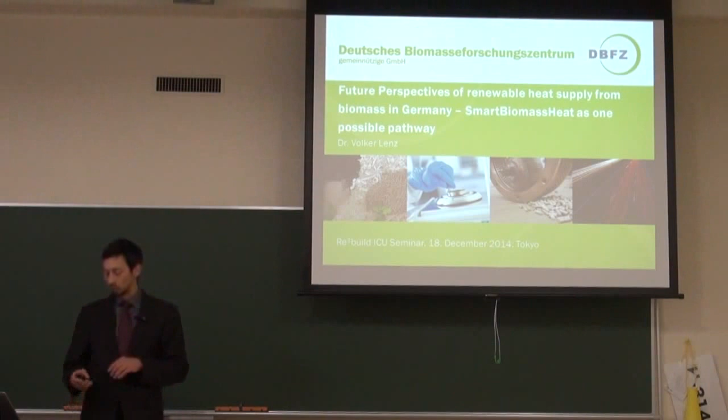Last but not least, I will give you some examples of research and development on this topic to come forward with this. So let me introduce a bit the German Biomass Research Center.

It's owned by the Federal Ministry for Agriculture, which is the only shareholder of our company. We have a supervisory board of different ministries in Germany: Environmental Ministry, Research Ministry, Building and Traffic Ministry, as well as the Saxonian Environmental Ministry. All these ministers decide, through their representatives, about the work we do with the funding we receive. Additionally, we have a research advisory council of experts from all over the world who give us ideas once a year on what we should focus on with our research.

We are organized in 4 scientific departments, of whom 2 have a very strong link to the Helmholtz Center for Environmental Research. One is Bioenergy Systems Research, where we look at potentials and the integration of bioenergy into the state-of-the-art energy system and also into a future energy system with more renewables.

In the Biochemical Conversion department, they deal with all kinds of anaerobic digestion. They have a lot of reactors to improve these processes, to look into the microbacteria work and so on. The Biorefinery department deals with all the liquid fuels and questions of transport, developing by gasification and synthesis the production of different kinds of fuels.

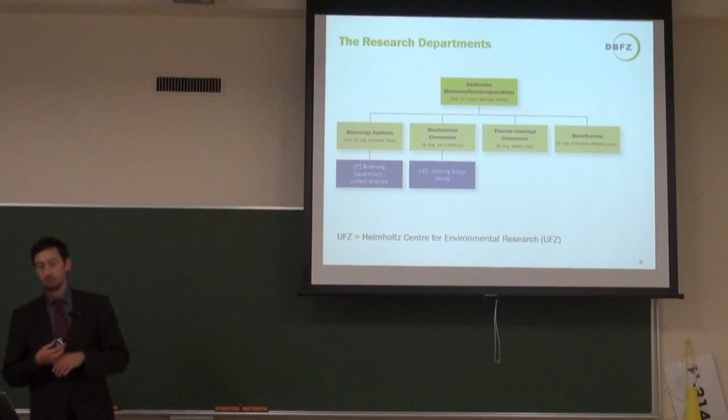And Thermo-Chemical Conversion, that is my department, where we work with about 40 people on all the questions of innovative solid fuels. That starts with wood fuels, upgrading these by pelletization, by thermochemical conversion, but also all kinds of agricultural fuels, residues, byproducts, wastes, and so on.

Then we have a working group for small plant technologies. There we look into boilers, furnaces, and so on - how to develop them, how to improve them, how to reduce the emissions and improve efficiency.

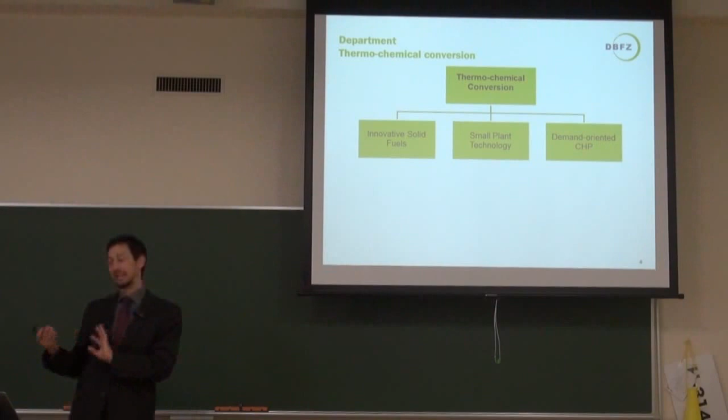And last but not least, we have a working group for the future where we develop demand-oriented small-scale CHP technologies - that will be one part of the smart biomass heat idea. They also concentrate on all the questions of controller systems and improving the work together of different energy sources and energy uses. So these are just some points of our main work here listed, as I've told you already.

So what is the motivation for bioenergy in Germany? This is clearly, I think, also true for Japanese conditions. We have in Europe some regulations about climate change protection. For the European Union, there should be a reduction of 20% until 2020, starting off the state of 1990. And Germany has

committed that we will have a reduction of 40%. And this year, our government noticed that we will probably not reach this target, so they have made up a plan to go for further measures and further actions to reach this target. Worldwide, you probably know this target of not more than 2 degrees centigrade of more average temperature on the world.

Some people discuss whether it should be 1.5 degrees or if 2 degrees is enough, but independent of that, it is clear that we have to have a reduction of at least 80% of all worldwide global warming potential emissions. That means for industrial countries like Germany and probably also Japan, we have to have a reduction of about 95%.

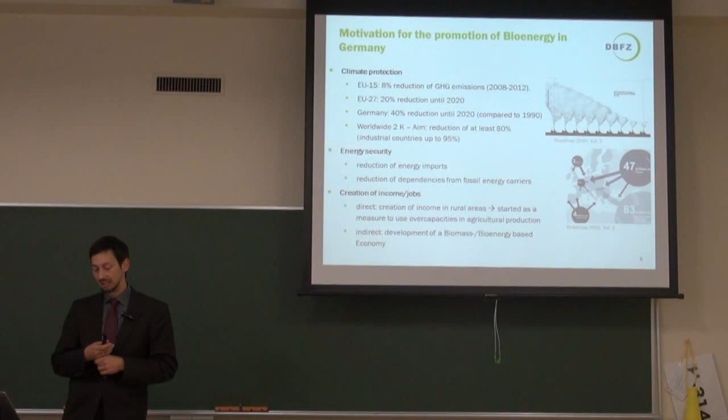From my two visits, I learned a lot about the fact that Japan has quite a lot of wood until now, but because of the history of the last decades, there was too little use, and now there has to be a lot of development to bring the value of all your forests into use and into new value chains. So that links very well to this target.

So what is special about bioenergy? There are some chances, some challenges. First, the chances: it's the most frequently used renewable energy in the world. About up to 80 to 90% of all renewables worldwide is bioenergy. And that's easy to remember if you think about its use for cooking and heating in developing countries, but also in countries like Germany, as I'll show you later.

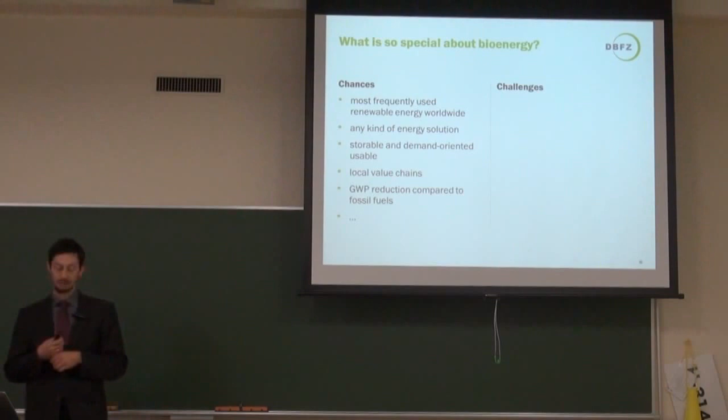Any kind of energy solution is possible. We can create heat, power, and also transport fuels from biomass. In comparison to other renewables like wind or solar, where you typically get electricity and sometimes also heat, biomass can supply all kinds of these energy solutions. It's storable, so you can use it demand-oriented. There are local value chains, as we discussed, and there's a global warming potential reduction potential compared to fossil fuels, and a lot more.

But on the other side, there are also some challenges. We have a limited potential, meaning biomass has to grow on area, and area is, especially for Japanese conditions, a very rare resource. So you can only create a certain amount of biomass. And as there are different kinds of uses - for food, for feeding, also for material use - we will possibly come to conflicts.

Sometimes from these conflicts there could be a non-sustainable use of the resources. If you think about rainforests, there's always the problem that if you take too much wood out of a forest, you can destroy it. That's what's meant by non-sustainable.

We have limited standardization compared, for example, to gasoline or diesel fuels, where it's very clear what's in such a fuel. In Europe we have some discussions, and some norming activities have already started. But biomass can be very, very different, especially regarding trace elements, which have a lot of effect on combustion emissions and so on. So a lot more work in standardization is necessary to avoid high prices of the technologies used.

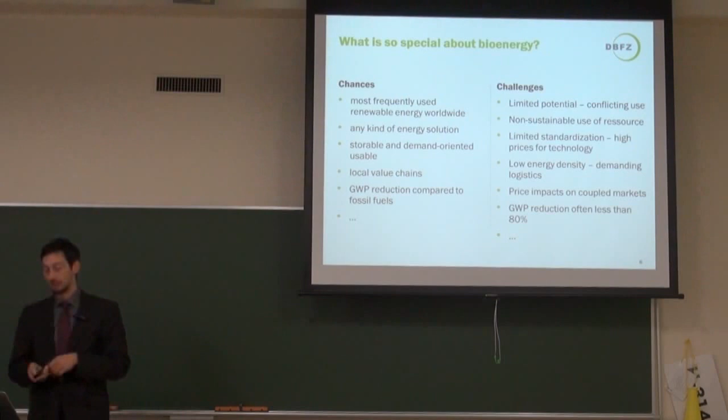In those times, prices for wood were very low, and the sawmills had the problem that they couldn't get rid of their residues. When they produced construction wood, they had about 30 to 50% residues from the stem wood, and they couldn't use it. They were glad if they could give that away for free.

That seems bad at first, but on the other side, prices got up so that it was valuable to take more wood and more residues out of the forest. So only with this increase of price could you manage to get the potentials used.

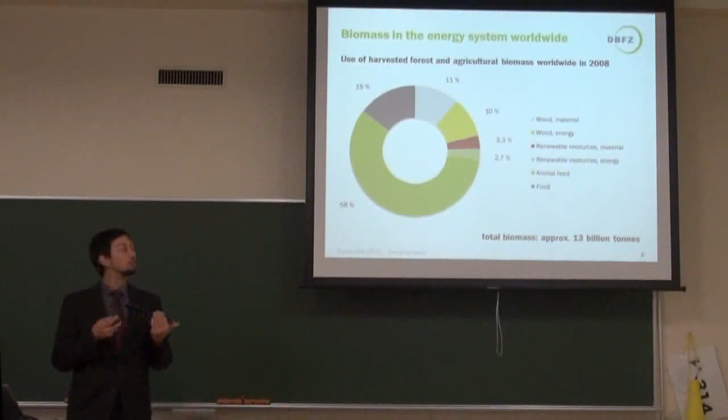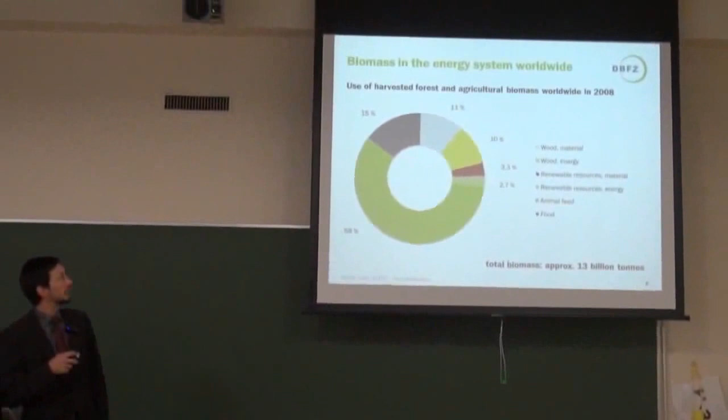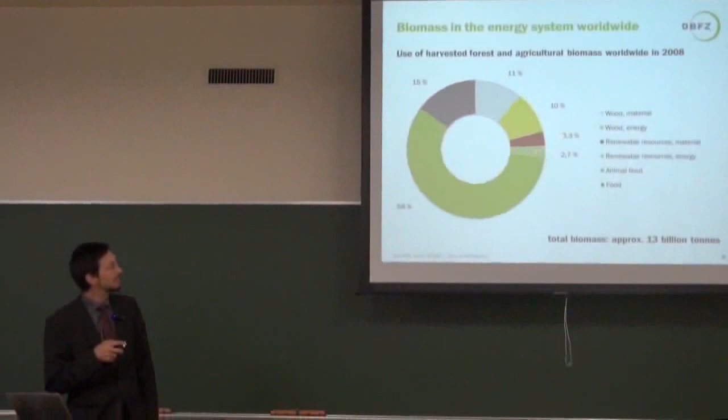That is linked very well between a material use of wood and the energy use of wood. We've seen 50-50%. And we have a use of energy by renewable resources. That is really planted and farmed energy. And that is in contrast to this big amount of about 73%, 3/4 of all the planted biomass.

And you see also that a very big amount of the biomass is just used for animal feed. And that means especially the usage and the eating of meat. So if we discuss this small part, we shouldn't forget about the amount of biomass we consume by our nutrition.

For Germany, a short picture. This is all the final energy consumption in Germany 2013. About 12.3% come from renewables. And the biggest part, even if we talk a lot about wind power and photovoltaics, which have developed very well in the last years, still more than 60% comes from bioenergy, and that in an industrialized country.

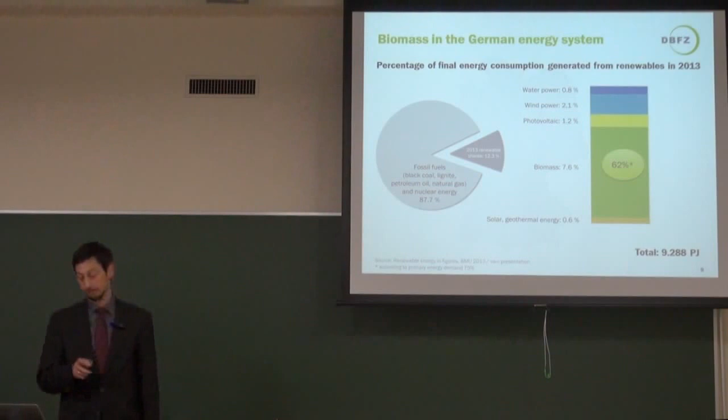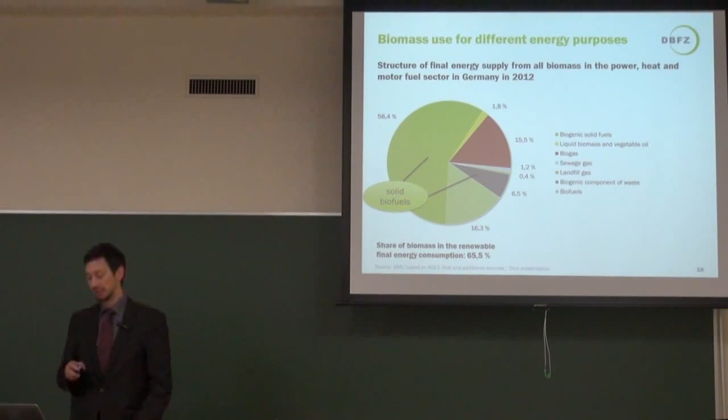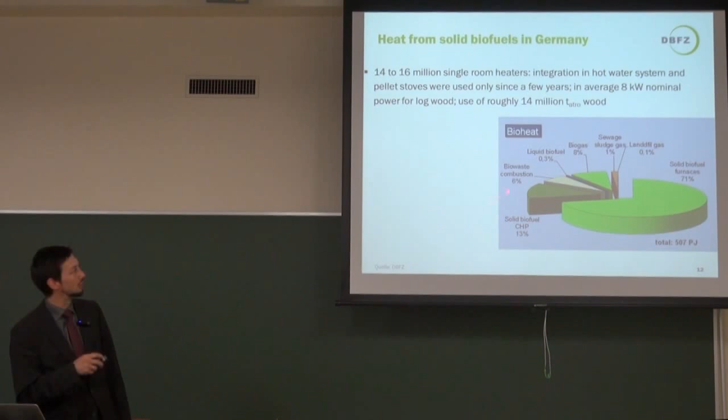So what are the uses for the solid biofuels? What you can see here is that about 70% of all the fuels from the primary sector is used in furnaces. And that means that we have about 14 to 16 million single room heaters. With a population of about 80 million people, we have 14 to 16 million single room heaters in private housing.

And additionally, there are about 0.7 to 0.9 million woodlog and wood pellet boilers in your basement for central house heating. That is very much more common than in Japan, I learned. We in Germany have longer cold winters, and so people like to have a central heating system with radiation and air changes. And the heat output is about 15 to 300 kilowatt each.

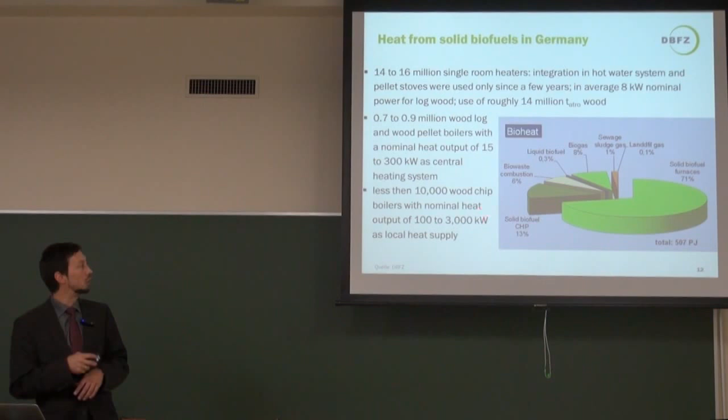Then we have less than about 10,000 wood chip boilers with a nominal heat output of 100 to 3,000 kilowatt. This is especially for the heat supply of district heating systems. So to see what is the state of the art for these technologies, we have the single room heaters here.

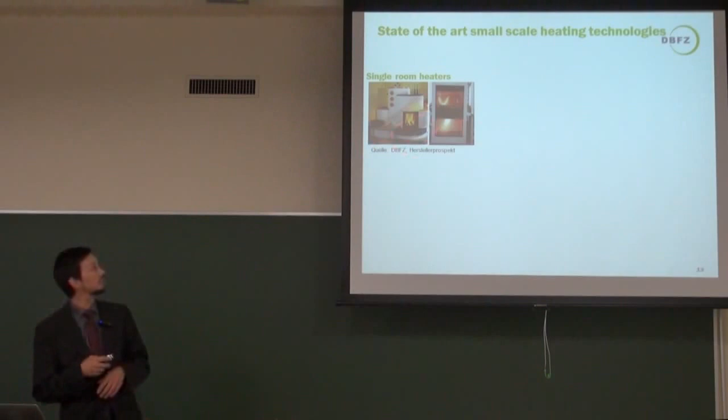For these stoves, the market developed very well, also for pellet boilers. What you can see here is a column of the pellet production capacity. There was a jump in the years 2006 to 2007 when this technology came to Germany from Austria and Switzerland. And you see that then this development can rise up very, very quickly.

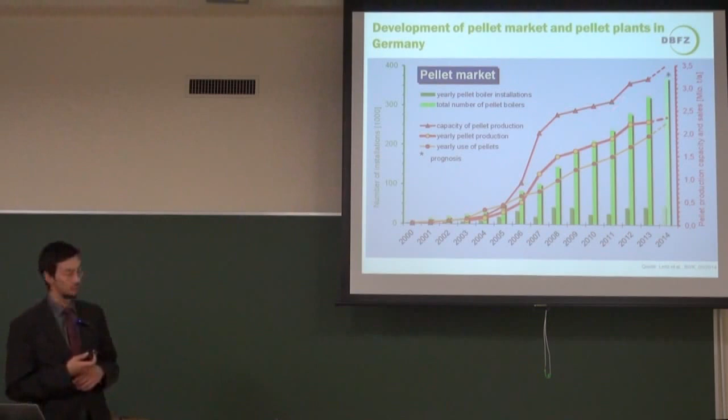We have installations of new units of about 20,000 units per year and reached already in 2013 about 300,000 installations in Germany. So what does the policy for these developments? On the electrical side, just a small insight, we have a Renewable Energy Act with a feed-in tariff. You have also in Japan integrated in the last years.

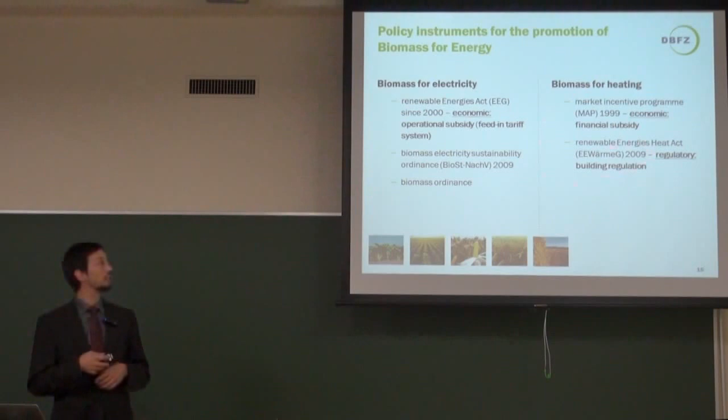We have a sustainability ordinance for biomass production to electricity and also a biomass ordinance where it's defined which kind of biomass can get a feed-in tariff. On the other side, for biomass heating, we have a market incentive program, especially also for private persons to get a financial subsidy if they install a biomass heating system. And we have a Renewable Energies Heat Act for new buildings and also for bigger renewings of buildings. There you have to install a certain amount of renewable energies.

What are constraints in Germany? In the biomass for electricity sector, we have a change of the Renewable Energy Act in 2014 this year, according to a long discussion about rising electricity prices according to the feed-in tariffs, that have stopped or lowered a lot of these tariffs, so that it is very hard to get new electrical power plants from solid fuels in the future because the feed-in tariffs got too low.

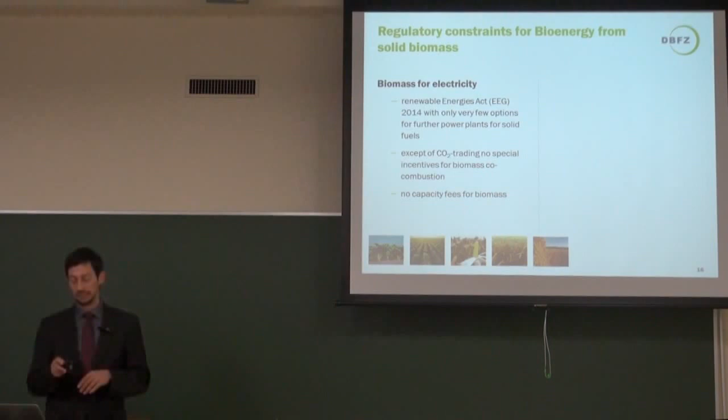We have very low CO2 trading fees in Europe at the moment. They are about 7 euros per ton. So there's not much incentive for big power plants for co-combustion at the moment. And we do not have any capacity fees for biomass, what could also be a kind of subsidy.

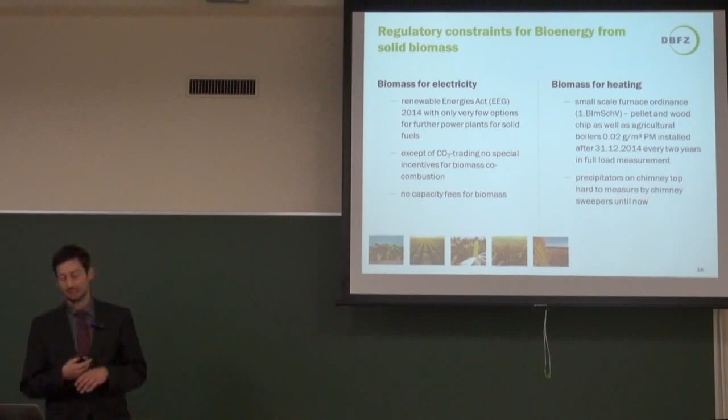In the heating sector, we have especially a problem with a new or renewed small-scale furnace ordinance, where there is legislation on the emission level that is allowed for private boilers, and it is lowered by about a factor of 5, especially for particle emissions, and that is a real hard nut to crack for the developers to get along with that without precipitators. And the precipitation for these small units is just under development, and there are also some additional problems on that field.

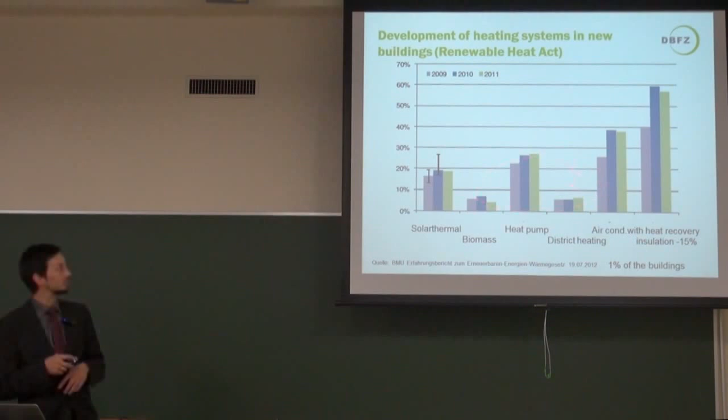That, in mind, leads to a statistic about new installed heating systems in Germany. And what you can see here is that biomass is more or less the smallest amount and percentage of all the new installed heating systems. Most people try to do a better insulation so that they can get rid of this need for renewable heating. And also a lot of people use air conditioning with a heat recovery. And for the renewable energy technologies, especially the heat pumps are very favored.

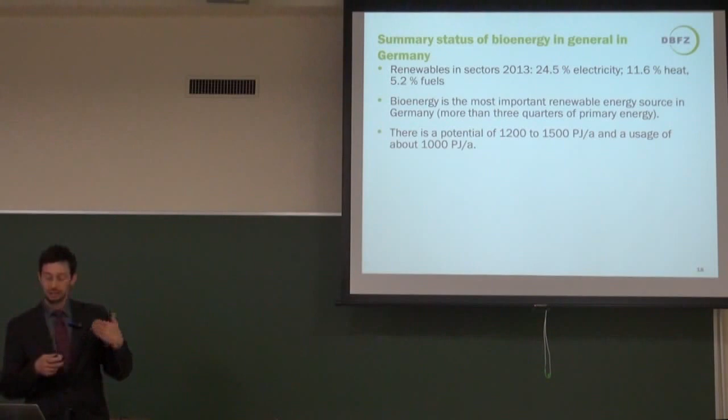So to sum the status of bioenergy up, we have renewables in the sector 2013 about 24.5% for electricity, 11.6% for heat, and 5.2% for fuels. We still have bioenergy as the most important renewable energy source, and there is still a potential from 1,200 to 1,500 petajoule per year, from which about 1,000 petajoule is used. So we can increase the use, but it is limited.

The better prices for wood and agricultural products are good for the producers. They give them a higher income, and it's more valuable to create these energy resources, but at the same time, the biomass feed-in tariffs are among the highest ones, even after the last reduction, because in solar energy they went very, very down according to the better price development.

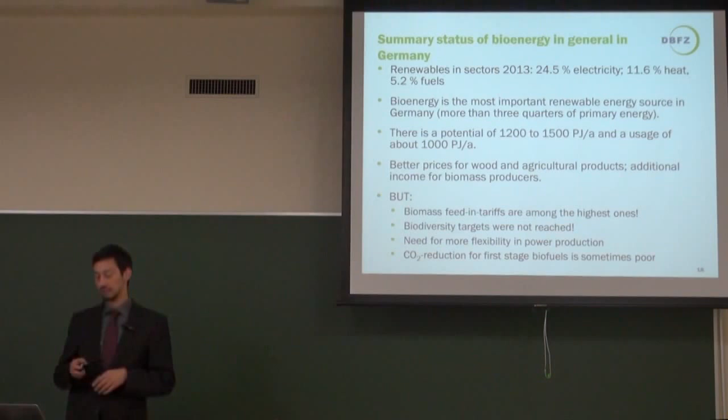We have not reached the biodiversity targets for many years. That's not only connected to the bioenergy development, it's a problem of our agricultural system, but that depends a bit. We have a need for more flexibility in power production. I will show you later on. And in the biofuels, I have already told there's not enough CO2 reduction.

So what restrictions are there for further bioenergy development in Germany? Biomass gets more and more scarce, I told you already. And in the future, we think that especially wind and solar will have to be the backbone of the quantitative production of renewable energy, because there are very, very big potentials. This is true for electricity, but also if you think additionally of geothermal heating for the heat sector.

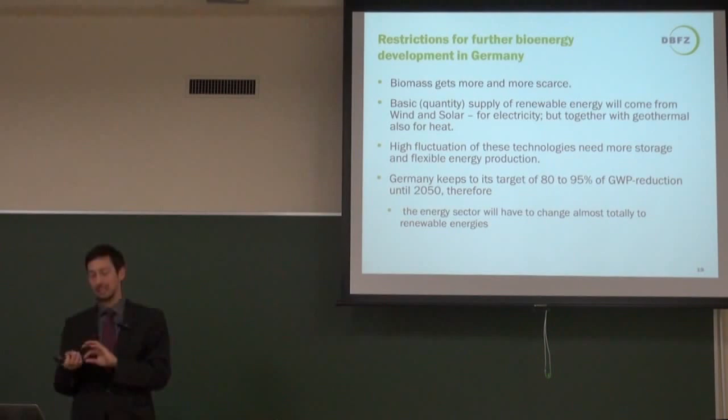According to the high fluctuation of these technologies, for electricity as for heat, we need more storage and more flexible energy production. And if we keep up this 80 to 95% target for CO2 reduction in Germany, we have to change our energy sector totally to renewable energies. So the compensation of the fluctuating renewables cannot come from fossil fuels. It also has to come from renewables. And the demand for the heating sector has to be reduced by at least 80%.

Otherwise, we will not have enough potentials to come to this totally renewable heating production, but that is possible by better insulation. So, is there a future for biomass combustion of solid fuels in the future? We think yes. But there is not the possibility for a massive quantitative increase in Germany anymore without imports of biomass. And that is, for a sustainability aspect, not politically wished in Germany.

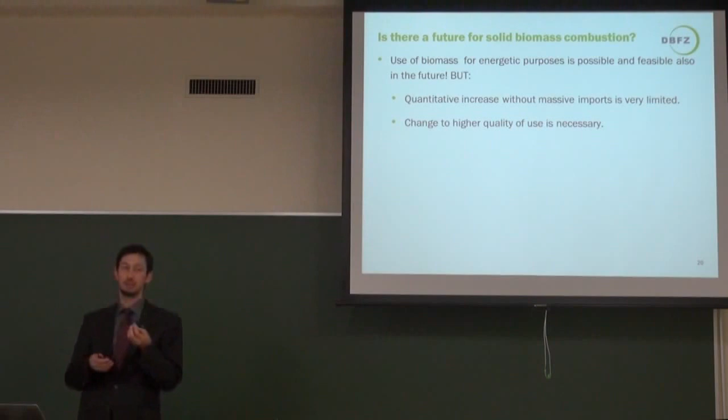And because of that, we have to have a change to more quality and less quantity in the use. And that is the point why we will come to other pathways of biomass use for heating. What we have to keep in mind for this research and development: we need sustainable biomass. So that means residues, waste, byproducts, because then all the need for the nutrition and so on of the planting is already for another purpose there. So the global warming potential reduction potential is higher.

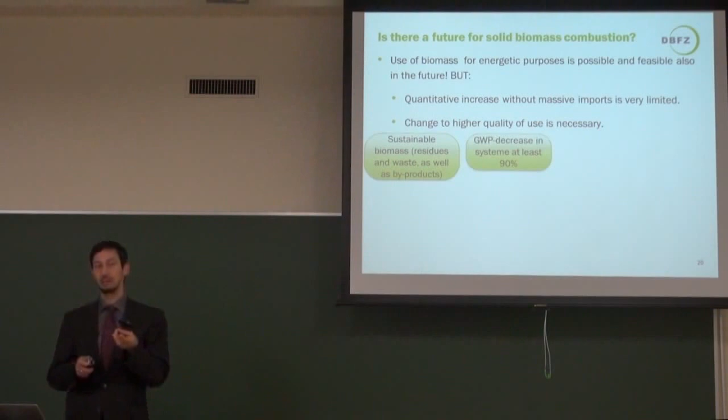The system integration must be that kind that we at least reach 90% of reduction, also with the biomass technologies, and therefore a maximum of efficiency is needed. And always keep in mind, especially for combustion processes, we have the problem with the particle emissions. We should reach a minimum of environmental impacts from the exhaust gases as well as the waste. And clearly, we have to compare with other renewable energies, and only if there is in certain technology pathways an economic advantage, then we will have a chance in comparison to solar, wind, geothermal, or so on.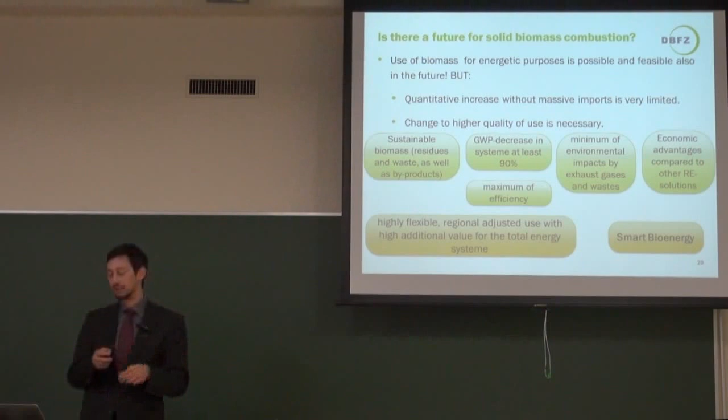That all means that for the future, we have to develop systems that have a high flexibility, that are regionally adjusted, use the fuels and residues that are available in a region with a high additional value for the total energy system. And that means for us that we will change the quantitative use of biomass towards smart bioenergy. What is smart bioenergy from our perspective?

It is a reallocation of the already big amount of biomass used worldwide, as well as in Germany, away from the traditional aspect of as many full load hours as possible, away from the baseload-oriented bioenergy to a more technically improved, more efficient, and more need-based use, and then a better integration in the total energy system of material use and energy use. So, what we cannot say at the moment is where we will go exactly, because that's in the far future. But we can give some criteria for new developments.

The first is that we think about smaller biomass throughput. We did have the discussion in Germany about very big industrial installations with hundreds of thousands of tons of biomass to be reformed to biofuels. That means that there could be 5 plants in the whole of Germany and then bring the biomass for hundreds of kilometers to one plant. And if you think about that, a lot of people don't like that. That is easy to understand. And all these negative mass effects you can avoid with a higher regionality and smaller units.

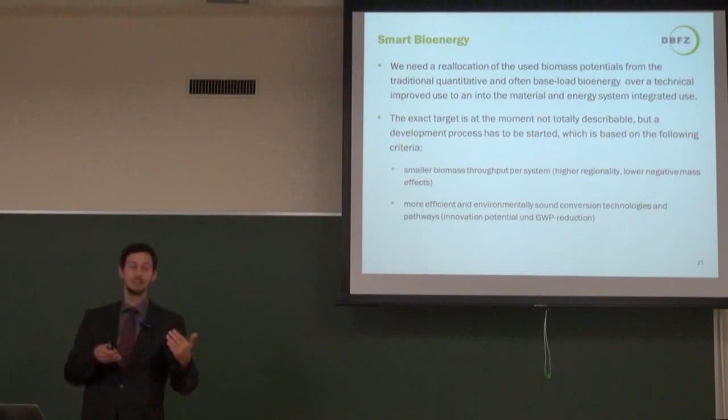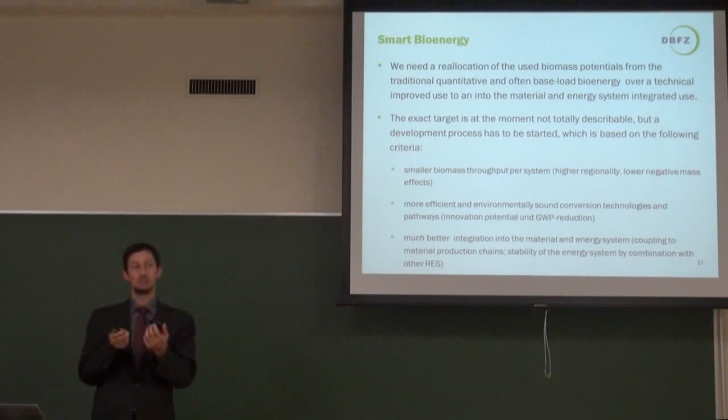We have to be more efficient, clearly, and especially environmentally sound, so that the neighborhood is not disturbed by this technology use of the fuels. And we need a better integration in the material and energy system. That means that we should couple a biomass value chain between the material production and energy production. If you look to forests, then try to get out as much construction wood as possible, and from the wood residues, you then can go to a good integrated energy production.

So what does that mean for heat production? First, we should use firstly solar thermal, geothermal, waste heat, and also if there is additional electricity in the grid, then you can use that for heating, and then with small-scale biomass units, fill the gaps.

Secondly, for more environmentally sound technologies, we will probably go to pre-gasification in the combustion process or total gasification, then go to small combined heat and power production units with an intelligent buffer control system and also some catalytic gas cleaning system to go to very low emissions also during load changes. And last but not least, use residues and byproducts as fuel, and adjust your installation to the heat demand so that every energy you produce on the heating side is really used. And then look if you can produce additional power.

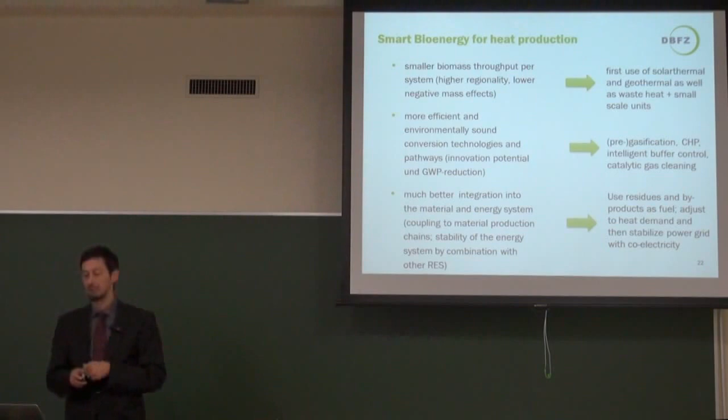And as heat can more easily be stored in a water buffer, for example, than electricity can be stored, you can produce your heat over the time and over the day at those moments when your local grid needs additional power to be stabilized. And that is also an aspect of better integrating into networks and systems. So as a result for the heat production, in Germany, we like nice heat. And we want to be self-sufficient. And for these reasons, we are willing to pay some money for wood and also for biomass systems.

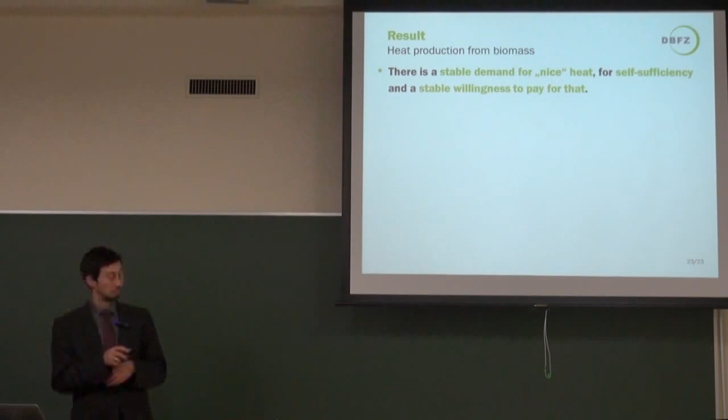We need 100% renewable heat production for the future to reach the 2 degrees centigrade target of climate protection. That means a massive reduction of heat demand and the use of all kinds of renewable energies. For our development, that means the units of boilers must become much smaller. Nowadays in Germany households have boilers with 10 to 15 kilowatt, but in the future they will have not more than 2, 3, or 4 kilowatt of power output.

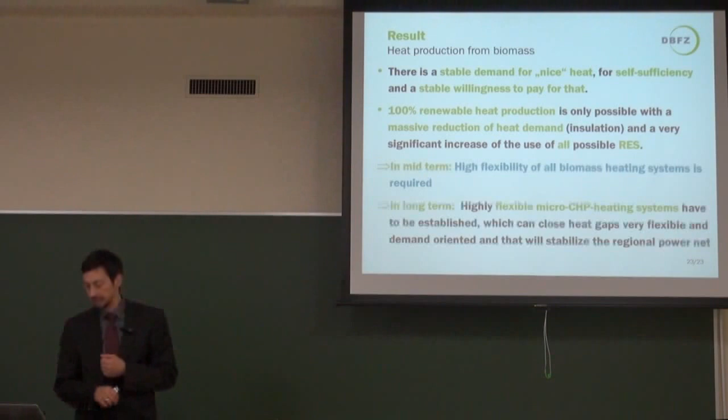So we need more flexibility in the heating systems, and in the long term, thinking of 2030, there will be these flexible micro-CHP heating systems. That is the concept of smart biomass heat, shown here. This concept needs a conditioning of biomass and regional biomasses to a high-end solid biofuel, so it can be well conformed and flexibly converted by new technologies.

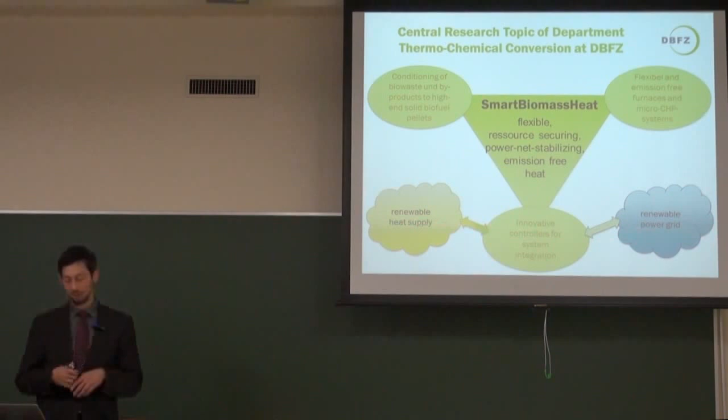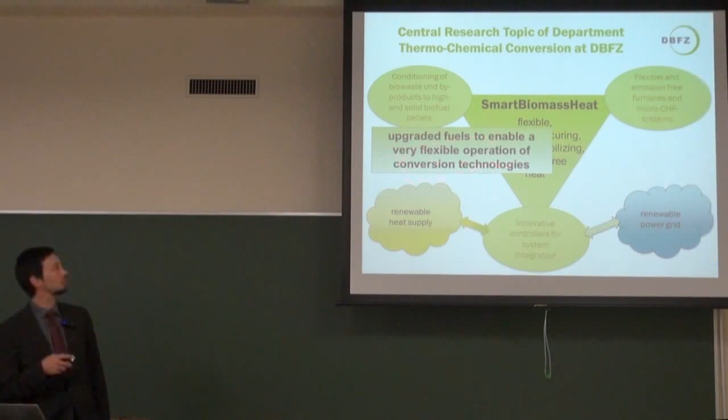These technologies are more or less emission-free, including CHP technologies. Very important are innovative controllers for system integration into a renewable heat and power grid system. What I will show you now are some first technology examples and developments about upgraded fuels to enable this flexible operation, and some emission reduction options during flexible operation we are working on.

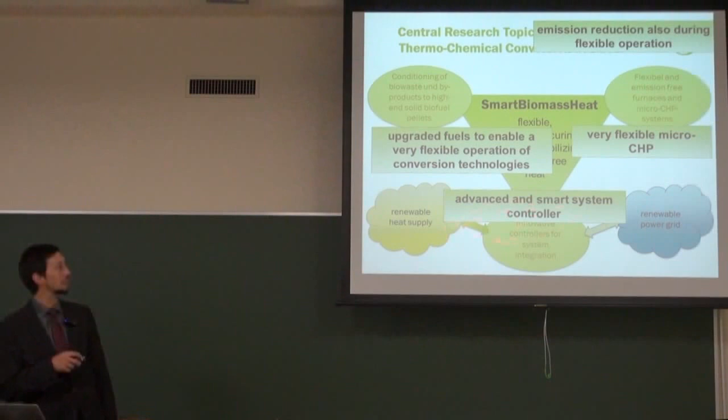Very flexible micro-CHP—micro-CHP is about less than 1 kilowatt electrical. A lot of people believe that is not possible with solid biofuels, but I will show you an example of that, along with advanced controllers and smart controller systems.

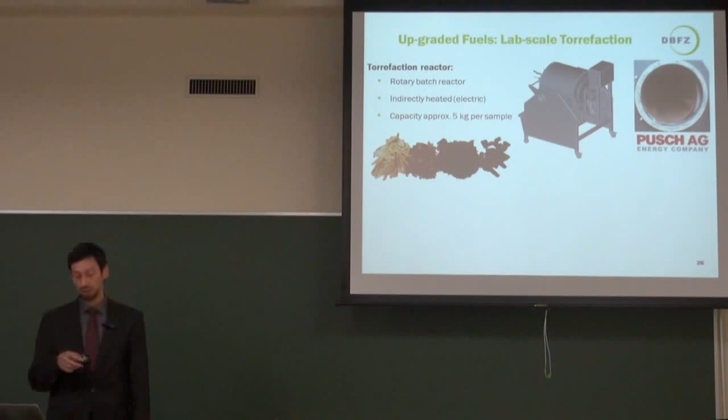To start off, upgraded fuels is firstly the question of torrefaction. Torrefaction is heating the material in either a batch reactor or a continuous flow reactor at about 200 to 300 degrees for 10 to 30 minutes. By this, the material changes and gets torrefied, becoming more and more dark, to a dark brown material. You have a loss of about 30% of your weight, but only 10% of energy loss. If you compact it afterwards with pelletization, you can increase the volumetric energy input by about 30 to 40%, meaning you come nearer to coal conditions and have a higher energy impact.

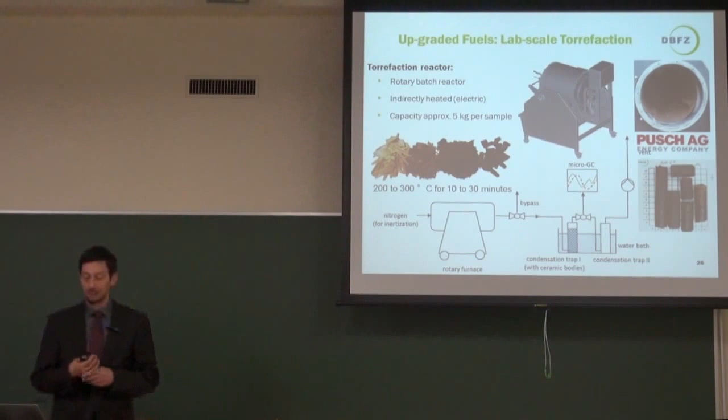This is what these fuels could look like. The FFPRI has just opened a new installation yesterday in cooperation with Sanyo Trading, and we are looking forward to cooperating on further development of these torrefaction systems.

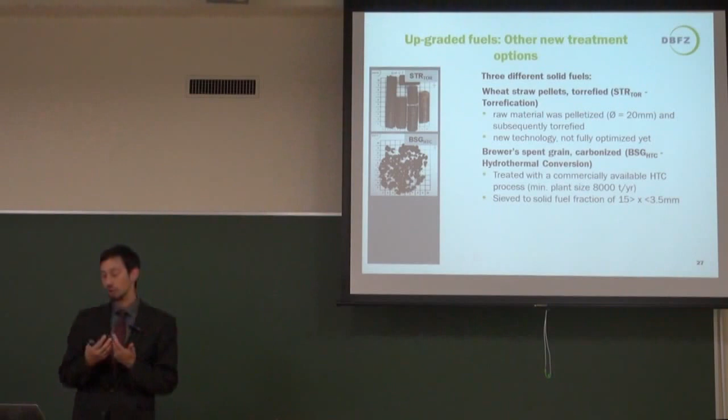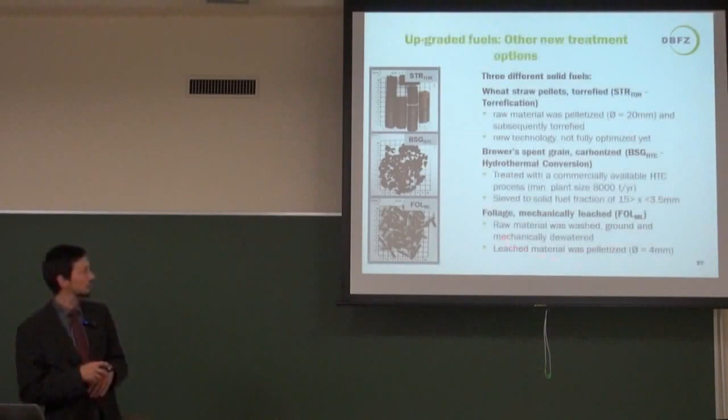To show you some other technologies for improving fuels, there's also hydrothermal conversion, especially for wet biomasses like sewage sludge. There you go to a wet phase, apply pressure and heat, and by that there's a conversion to a carbon-like material which you can sieve off the fluid and use like a coal process. What we are also working on in Germany is washing and leaching of the material, where you can get rid of some minerals in the fuel.

What you can reach with these technologies is improved storability and grindability. It's especially interesting for co-combustion in coal firing, dust firing, or gasification for biomass utilization. What you probably cannot do is improve the emission behavior, because you don't change the ash content and the ash elements—you can't remove them by torrefaction.

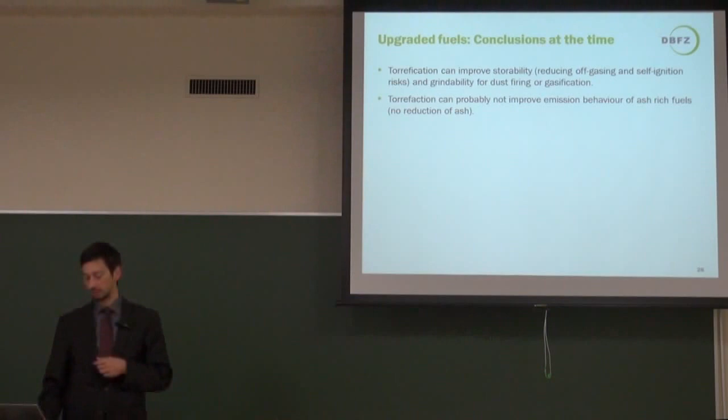You can create a high-value heating fuel from clean wood that can be used in typical boilers, but there is a higher risk of slagging and clogging of nozzles, so you have to adapt the boilers. But what we've seen, and that is important for our smart biomass heat concept, is you probably get a higher yearly or annual efficiency using this torrefied material, because it is better and more flexibly adjustable to different part loads of your boiler. At the moment, a lot of wood pellet technologies are not very good on that point.

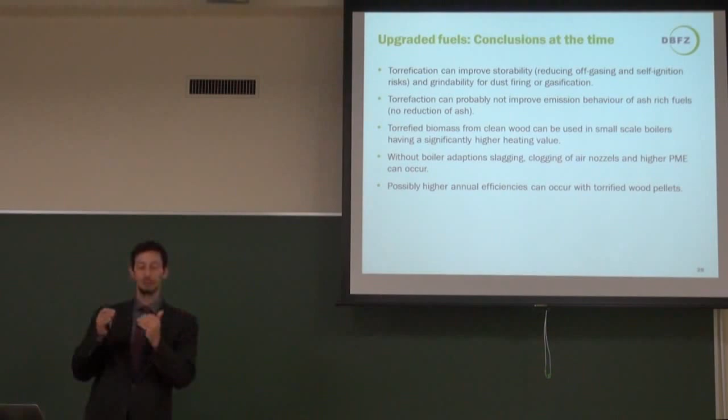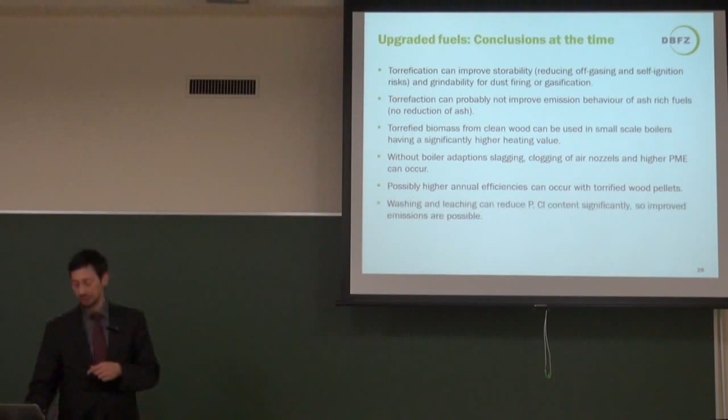In full load operation, they have an efficiency of about 85 to 90%, but if they have a lot of load changes, this efficiency goes down to 70%. So you have a lot of loss there, which can probably be reduced by torrefaction. Washing and leaching can reduce potassium and chlorine, which are very important for the building of particle emissions, and HTC can handle wet residues, which is typically otherwise a problem for combustion systems, and also allows you to leach out some ingredients.

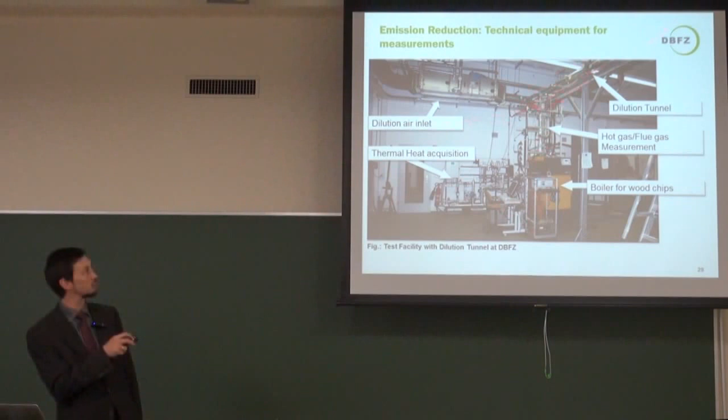For emission reduction, you see here one of our technical stands where we have installed a boiler. There we can measure all the emissions, we can put in different fuels, and afterwards, after the dilution tunnel, we again have the option to make research on the emissions that are created.

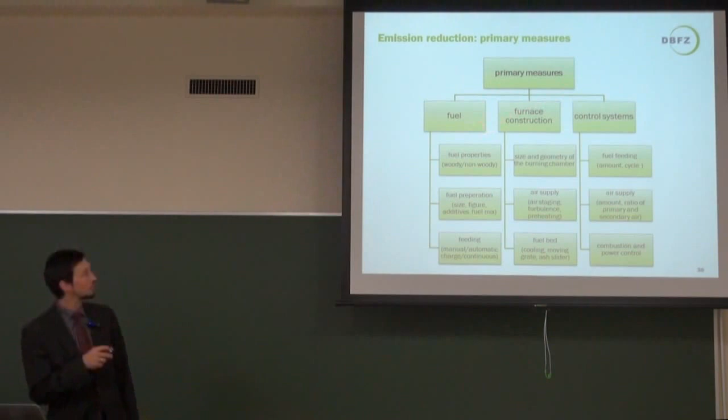Here is just an overview of the possibilities you can work on to reduce emissions through primary measures. Fuel side we discussed already. Furnace construction is a question of the burning geometry, which you can also improve through computational fluid dynamics analysis. We have air supply questions, fuel bed questions with cooling, moving of the grate, and so on, and also the control system inside a boiler.

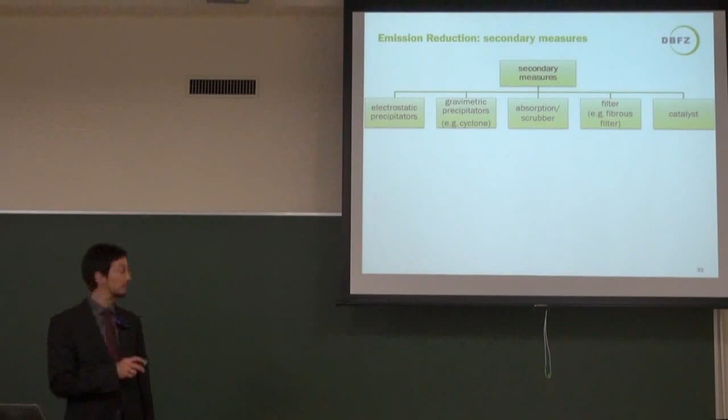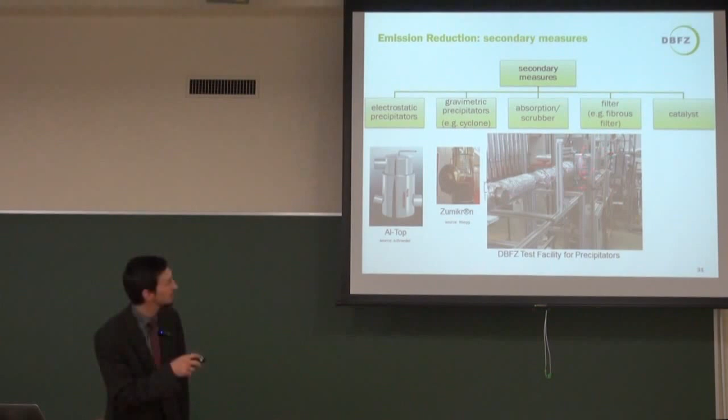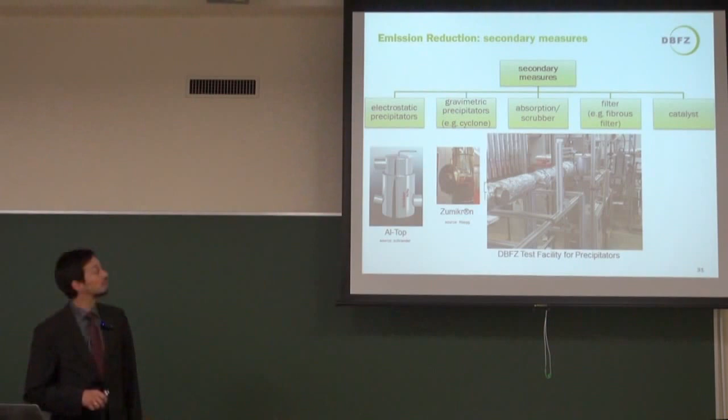Additionally, there are possibilities for secondary measures we also work on. Especially in the small scale, there are electrostatic precipitators—here are some examples of that. Gravimetric precipitators like cyclones are very familiar and already used. We have to measure these precipitators on a test rig like here, where there is a measurement opening in front and behind the precipitator, which is installed in between. At the end, you see a boiler where we can create different kinds of particles to be measured. Filtering systems and catalytic systems are also on the market.

Now to come to the CHP technologies. From the past, we know in a very small scale especially Stirling engines, which are typically used with gaseous fuels. They can work, but together with wood combustion it is a bit difficult, because typically on the hot side you get a lot of particle forming on the cooling area, and from that the system quickly loses its efficiency.

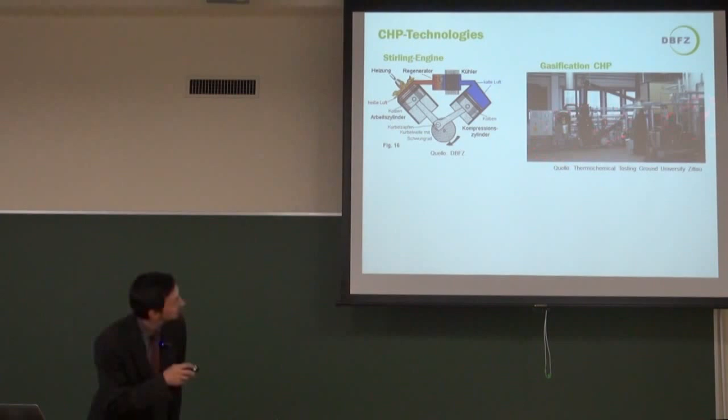What is very much in development is gasification systems with a motor engine behind them. So what you can see here is the gasifying and cleaning system, and then the gas comes to a motor engine. Sanyo Trading is introducing another technology to Japan—that's Burkhardt—with a bit of a bigger size, and also using pellets for a better

quality of your production. What we had for some years in Germany is biomass ORC technologies—it's an organic rankine cycle. That means you have a biomass combustion, and then you go over a thermo oil circle to create an organic vapor, which is a bit easier than a steam process because the security aspects are not so high, but also the efficiency is only down to 15% electrical.

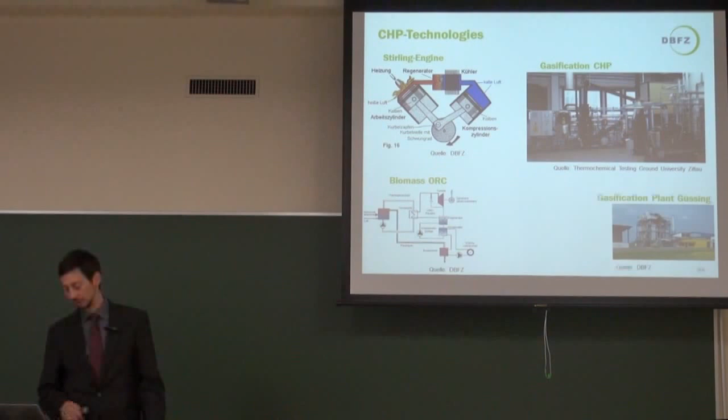And then there are some big gasification plants and also waste wood power stations for steam engines with an electrical efficiency of about 30%. So what was the development in the last years?

The steam plants with a big size increased very much at first, but nowadays, because of scarcer resources, higher prices, and lower feed-in tariffs, we got down to perhaps 2 or 3 installations per year. ORC technology had a short time of sharp increase in development and then also stopped more or less at a stable amount installed.

But what was very much increasing in the last years is this gas engine technology after gasification. I can say it has been proved in Germany and Austria that gasification systems from the right producer can work, also for a lot of full-load hours. As I heard, Burkhardt has in total about 1.5 million hours of running systems. That is quite a high number, and you can expect that if you have the right fuel chain and do the right management and install the system correctly, it will run for the prospected 15 to 20 years.

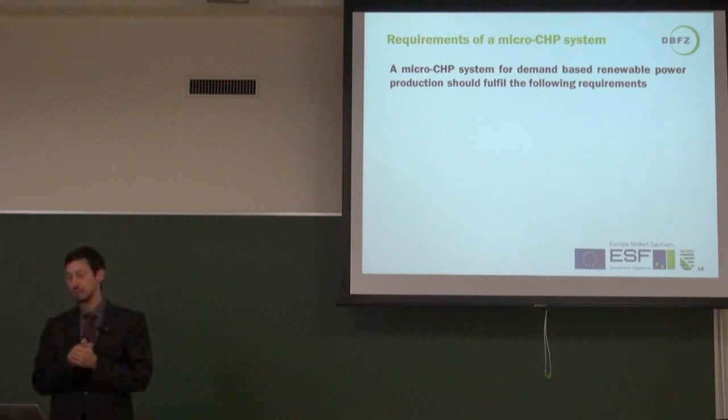So what are the requirements if you go to a micro CHP? That's even smaller than these gasifiers, with perhaps 30 or 150 kilowatt electrical. There you have some special requirements. What we defined is we would want a high electrical efficiency—5% or 10% is just a game and not really useful.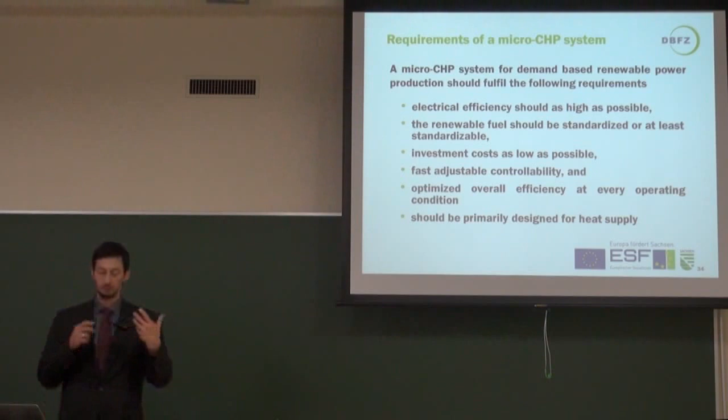Additionally, we have to standardize the fuel. We see that with Burkhardt, they go away from wood chips to wood pellets—higher standard, clearer conditions. And if you get smaller, you have to have your process more under control, so standardize the fuel. Investment costs have to be low. You should have adjustable control, and you should optimize the overall efficiency at every operation condition, so at different heat production outputs. And from our point of view, to have a high value, you should be able to use all the heat—so first adapt to your heat need and heat demand, and then your technology.

So what you see here is the work of a student, a very first example, only to show that it is possible to create such a thing—it is a gasifier, just a ton, where there's filled in some charcoal from wood material.

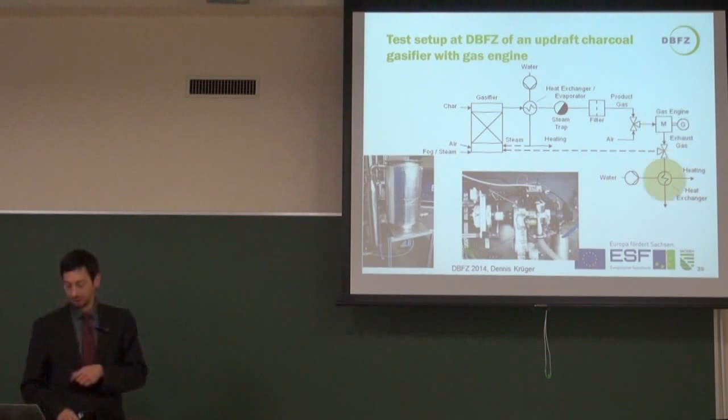This is gasified in an updraft gasifier. Afterwards, the typical cleaning systems, a filter system, and then it goes to a mixing with the air according to the need of your power output. And then we went to a bicycle motor just to show that you can work with very cheap engines and motors, and then you can get the heat output over a heat exchanger.

Last but not least, controller systems. What we did in this project is to improve and develop a system controller and a real system controller. So there is a pellet boiler, it has its own combustion controller system. We have a buffer tank and a solar system, they have a solar system control. And we added an additional system that is linked to the internet for weather forecasting.

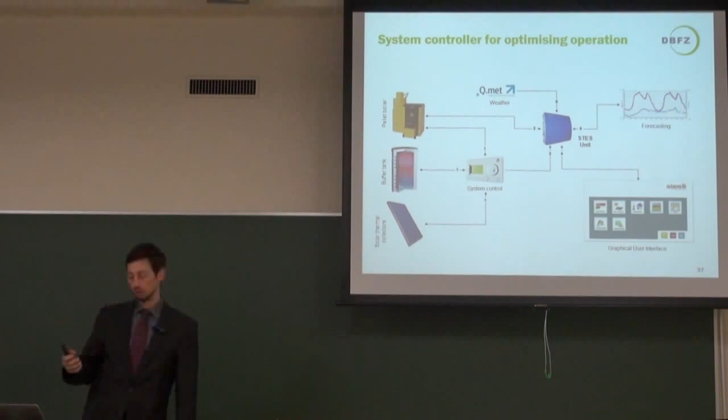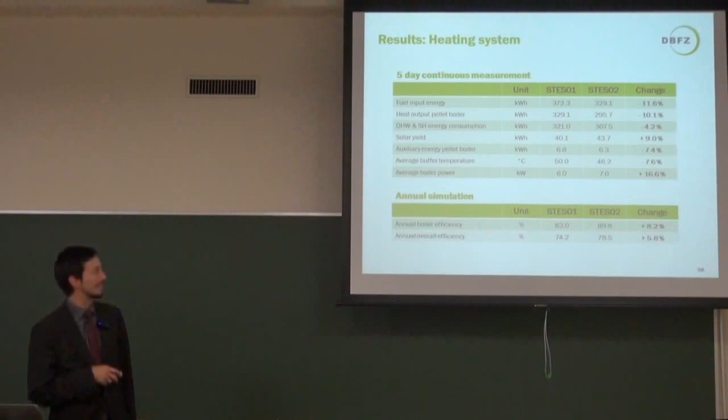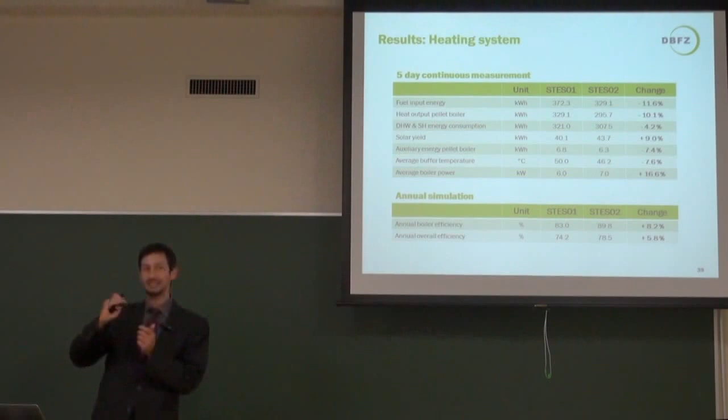For the next step, we want to go into the boiler control so that we can also give it the load range the boiler should work in. And from that, we expect additional gains.

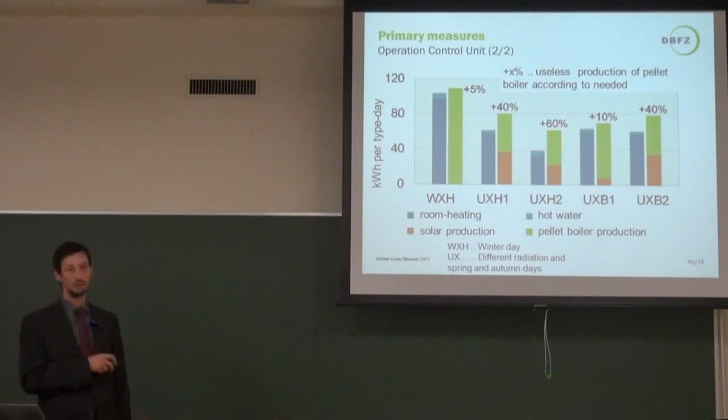Here in another graph, you can see where these improvements come from. If you go to a changing day in spring and autumn, or typical winter weather like now, you have some good solar production, and you need room heating and hot water heating. The pellet boiler produces much more energy than is needed because in the morning your buffer is down, so the pellet boiler runs for a long time, heats the buffer up, and then you can't get your solar energy into the buffer - it's lost. So you can cut off 60% of overproduction with a good prognosis, and that is what we will do.

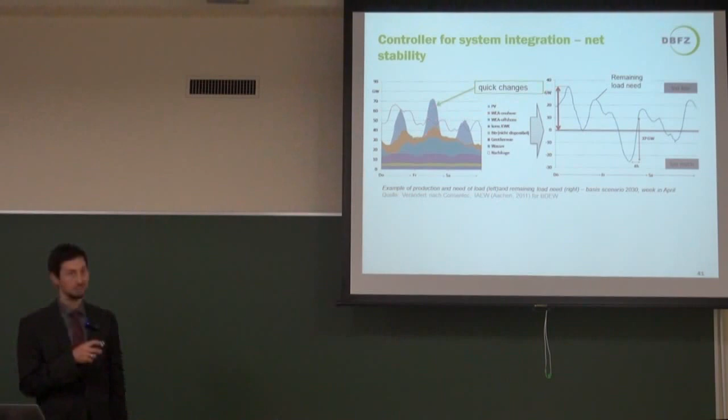And the last point is the question of controllers for system integration to improve grid stability. Here is a prediction for 2030, showing the different renewable energies - that red curve is the demand for electricity in the system. What you see here is that there are times when there's more power generation from renewables, like photovoltaic, in 2030 than is needed. If you calculate production against demand, you see there are times with too little renewable production, but also times with too much. You have to compensate for that, either by stopping solar production, which isn't really reasonable, or by using the green bar - the bioenergy.

As it is storable, you should give bioenergy systems a signal for when they should run and when not. For this development, in the last slide, we move to the smart biomass heat concept. There we have a controlled system with need-based flexible conversion technology, either combustion or gasification, to give heat supply, or by micro CHP technology, all the power for the time needed in the system. For example, if you have your own house - in Japan, I've seen in Tokyo always these small solar systems and very small wind turbines.

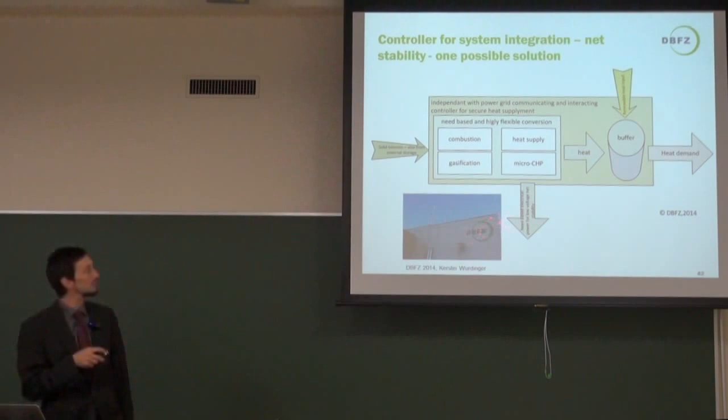If you have such a system, you can check from a weather prognosis when you need additional electricity production. That can come from this micro CHP. You produce heat, put that in a buffer, integrate other renewables from the outside, waste heat, also overproduction of electricity, converted very easily to heat.

And that is the idea we want to develop with the smart biomass heating system, or smart biomass heat.

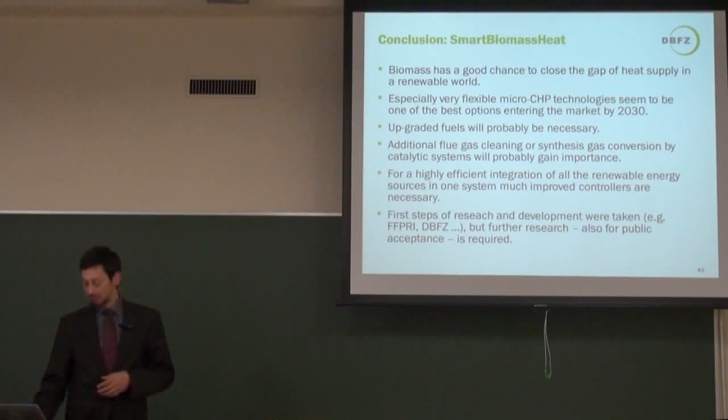So many thanks. The conclusion is to fill the gap. I've tried to show you that there is already some technology step towards that, and now we have to go on in development to bring that to acceptance in the public and to fulfill the needs to make it marketable. So many thanks for your attention, and feel free for questions.

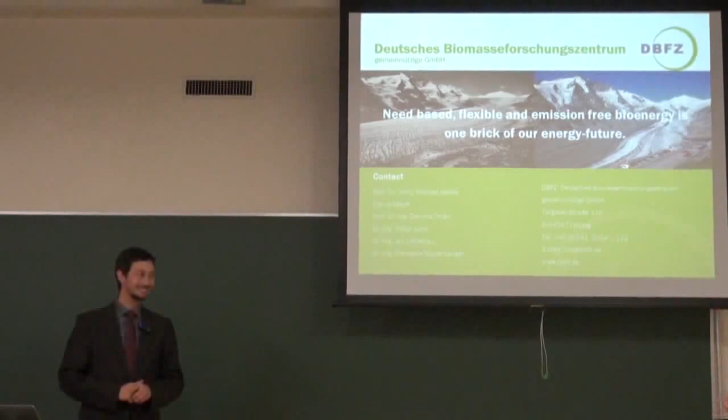Thank you. My first question was, on your slide you said in order to make the 100% renewable heat production, you need a massive reduction in heat demand and installations. Can you talk a bit more about the actual practical force that the government may be conducting, or how would that actually be conducted?

In Germany, we have a special legal act that gives you limitations if you want to build a new house. There are also limitations if you renew more than one side of your house, or if you want to change all your windows, you have to fulfill special standards.

And these standards get stricter every 2 or 3 years, and by that there is a push. But the problem in Germany is that for new buildings this works very well, and on the European level there is an incentive that by 2020 or 2025, new buildings will all have to be passive houses. No others will be allowed to be built.